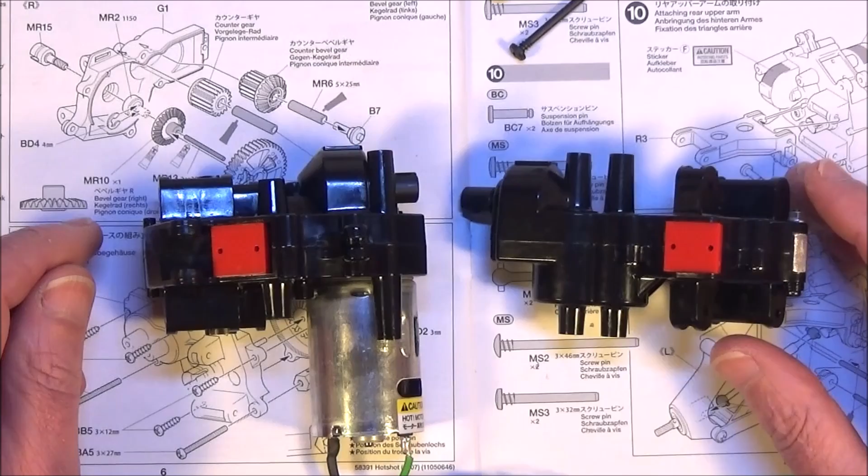In part 1 we got to step 8 and we ended up completing the rear gearbox and the front gearbox, as you can see, ready to go.

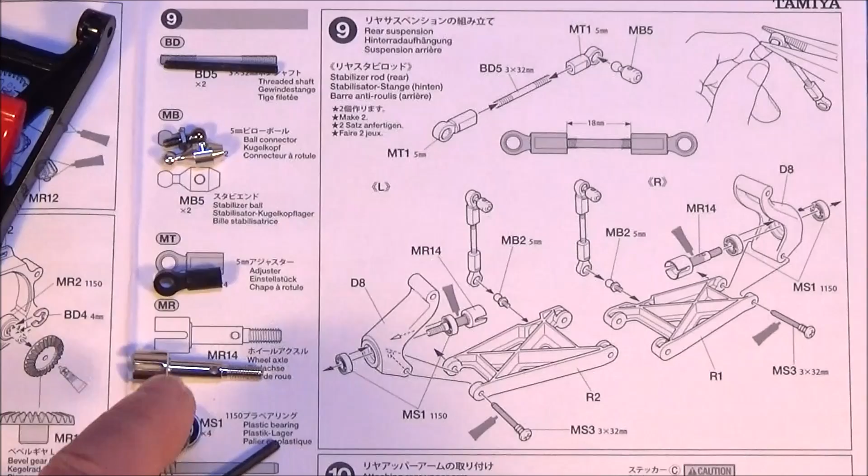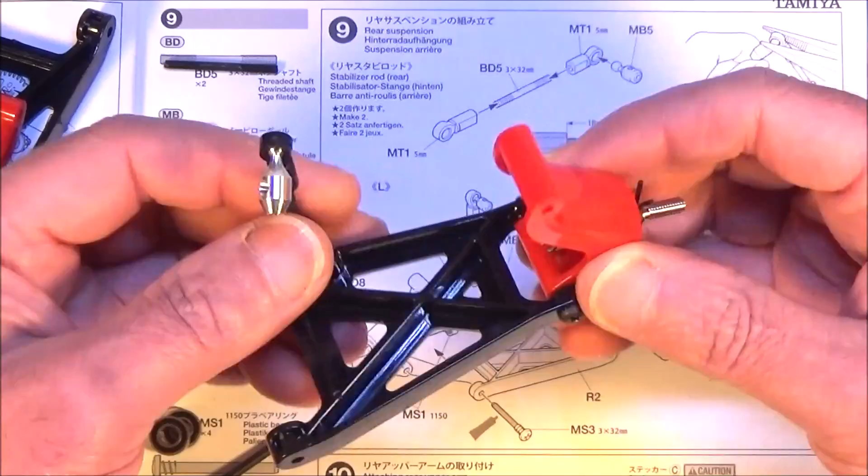So let's jump straight into step 9, which is the rear suspension. As usual, before we start building, best to get all the parts laid out and check them off against the diagram there on the left. As you can see, I've already made up one side of the suspension because both sides are basically the same. So it should end up looking something like this, and we'll see how we got there.

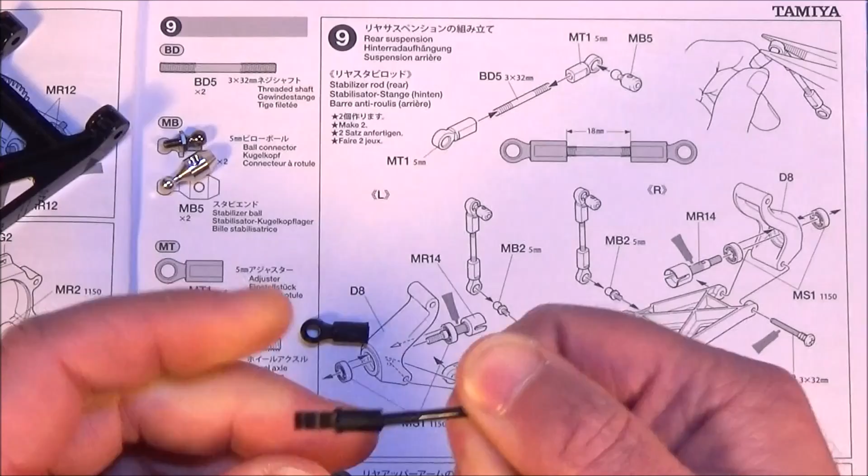First of all, get your black threaded shaft, 32mm long, and 2 of the black ball ends, which are MT ones, and basically just screw one on each end. Once you've got them started, just screw it up against each other.

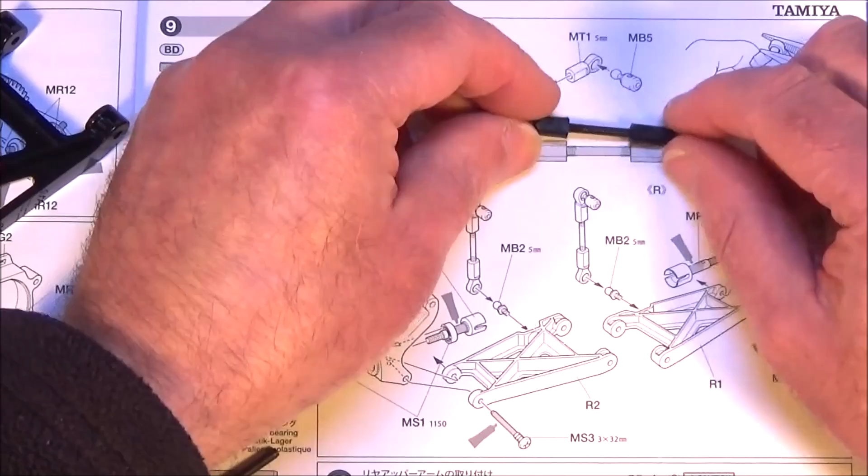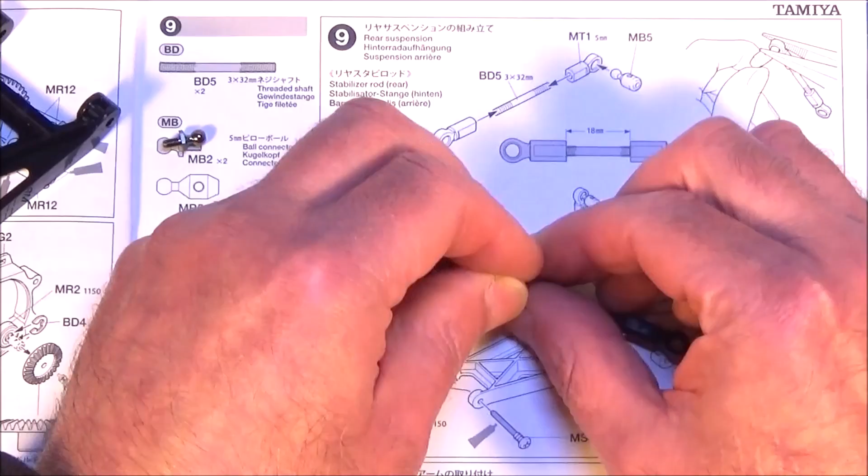You can use the diagram here, it's to scale, just to make sure you've got it the right length. Then we've got to pop in this ball joint, which is MB5, and I think the easiest way to do this is just to use a socket or something like this. Just put it over the top and press down, and that's connected.

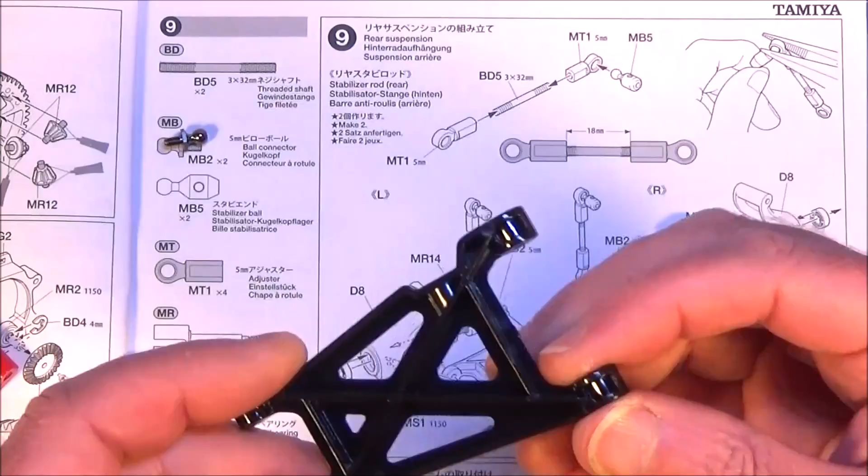I'm making up the left side of the suspension now, so you need this part R2. Copy the alignment of the diagram. Put your small ball joint into this hole. These are very hard plastic, so make sure you don't over tighten this ball connector, just a nip up will do.

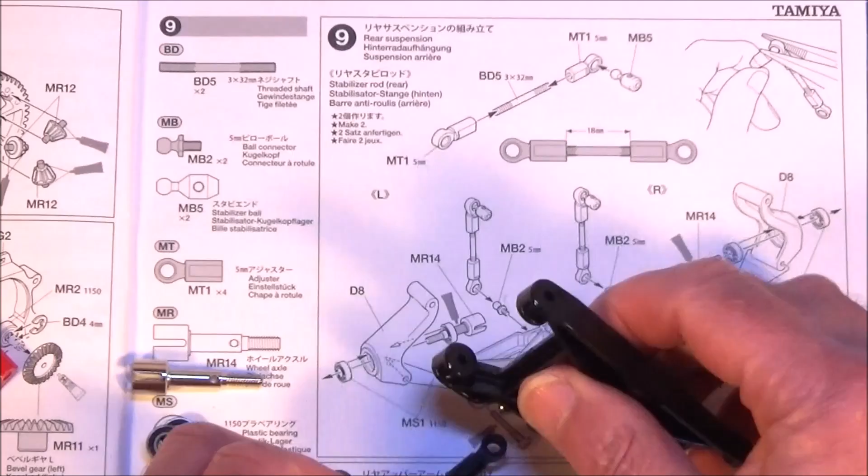In this alignment, just pop on that bottom ball joint. Again, I'm just going to press down on the table. There we go. Then you want part D8, just press in your bearings or bushings, one in each side.

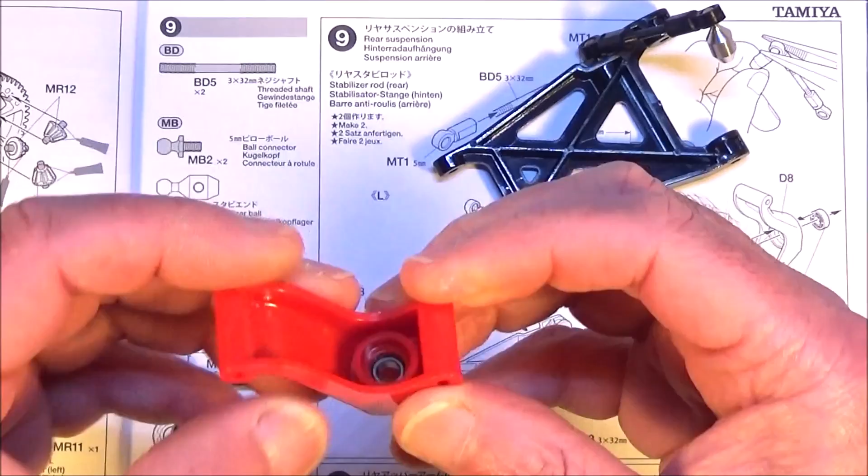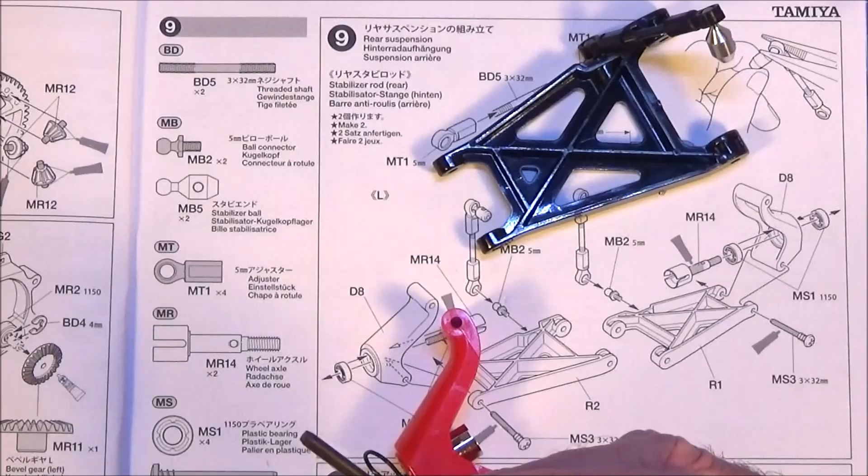Pop in your wheel axle, which is MR14. I do recommend popping in an R-clip just to hold that in place so it doesn't fall out. And your 32mm screw pin, put a bit of grease on that. I do advise putting grease on these because they will rust really easily, just a very thin coating will do.

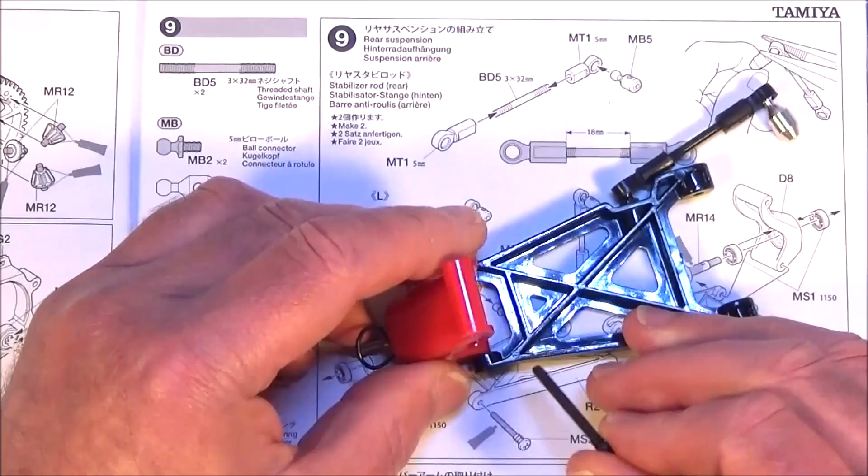Pop that into the arm, push the pin through as far as it will go, and then just nip that up. And there you go, that's step 9.

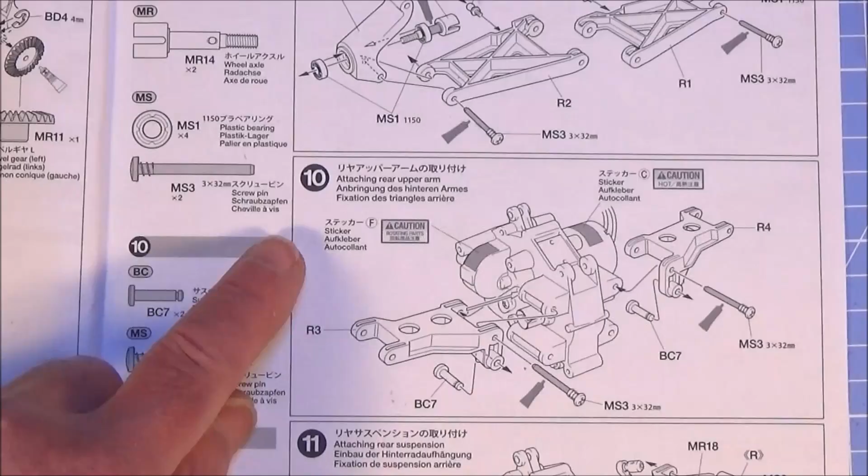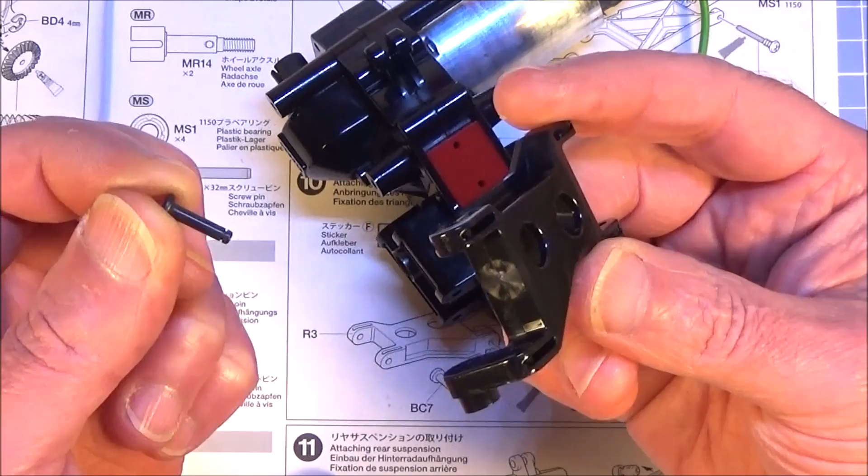In step 10 we're going to attach the upper arms, so for that you need the gearbox assembly you've done earlier, and just copy the alignment of the diagram so you've got it in this position. Then you want part R4, and this pin, which is BC7, that goes through that hole there like that, and it's a very tight fit.

Again, 32mm screw pin goes in the top here, and give that screw pin a nip up. Then exactly the same for this side, this time with part R3. Pop that pin through, and then the screw pin exactly the same as before.

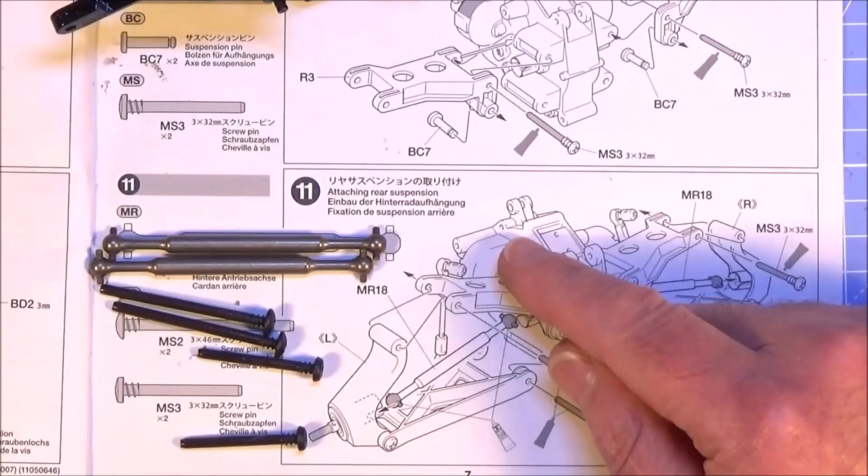In step 11 we're going to attach the rear suspension, the lower arms we did earlier, so I'm just going to do the left side. Get the bottom lined up and pop in MS2 screw pin, which is the long 46mm pin. Get that done up. Obviously put a bit of grease on those pins.

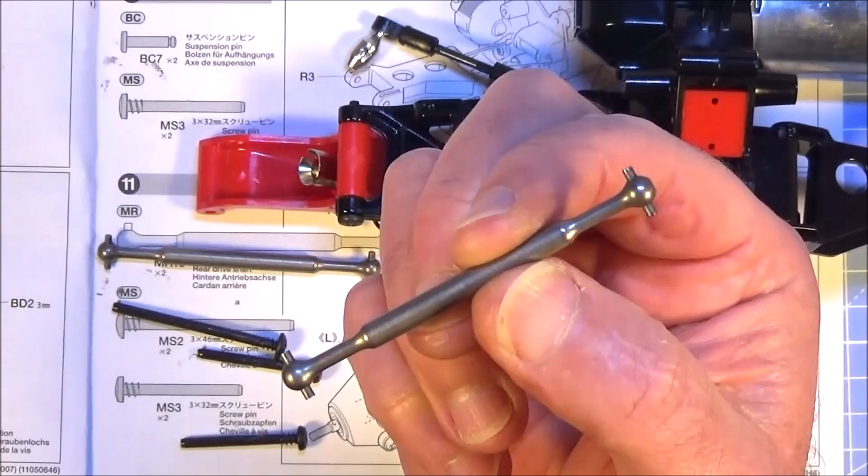Then you want your rear drive shaft, which is the lighter of the 2 drive shafts. You can see this is the front one, I think, with the ridge in it, and it's black, so this one, don't get them mixed up.

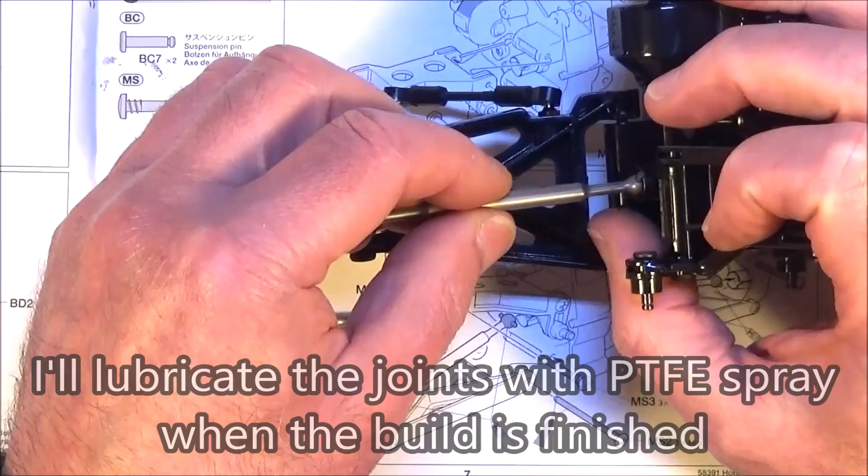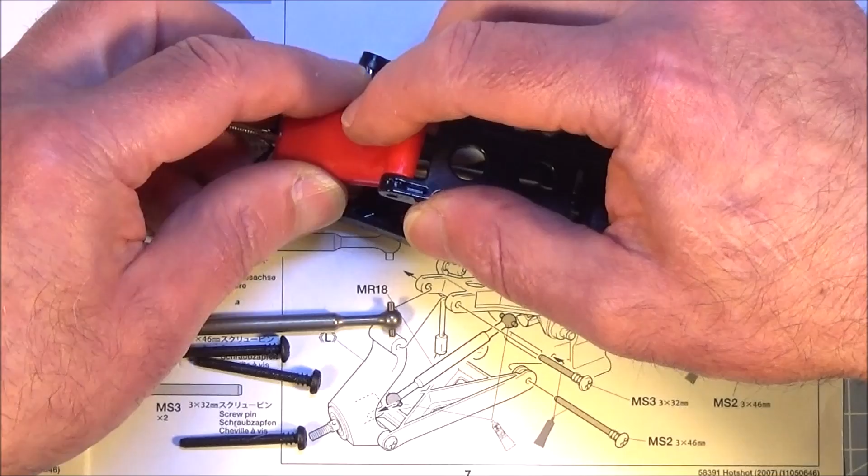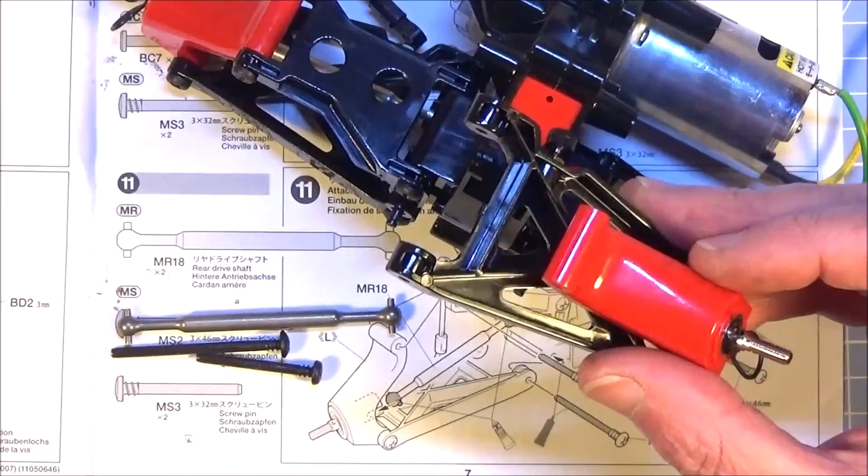Pop that in the output drive cup and pop the other end in the wheel shaft. Then we can align the top holes and pop in the shorter 32mm screw pin. Repeat for the other side. At the end of step 11 it should look something like this.

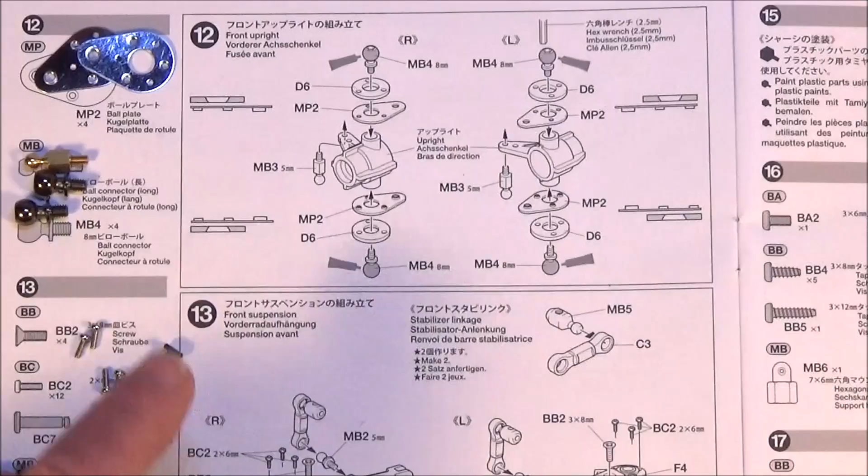Now steps 12 and 13 are all about putting the front suspension and steering components together, and I've already done the right hand side, which is this one here and down here, and you'll end up with something looking like this.

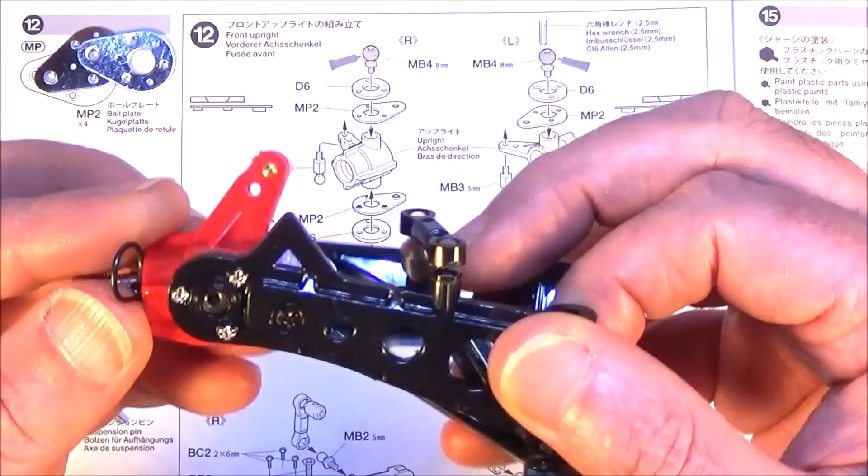So we'll just go through putting the left hand side together. It's exactly the same but opposite. So the first thing we need to do is get the upright.

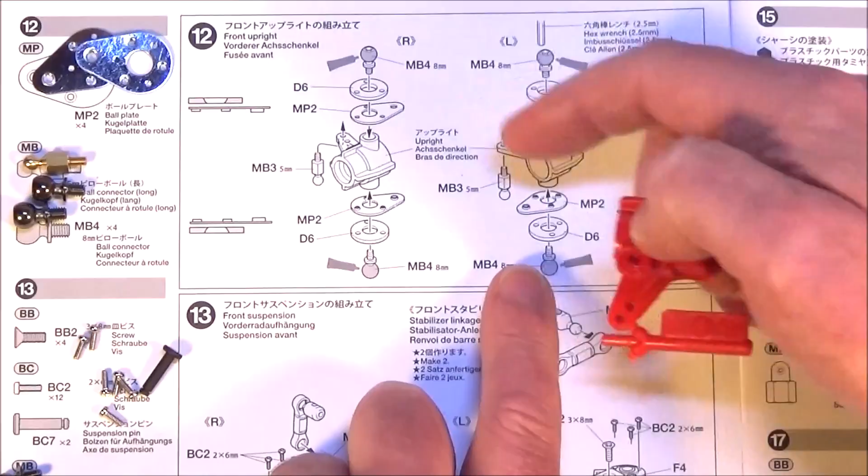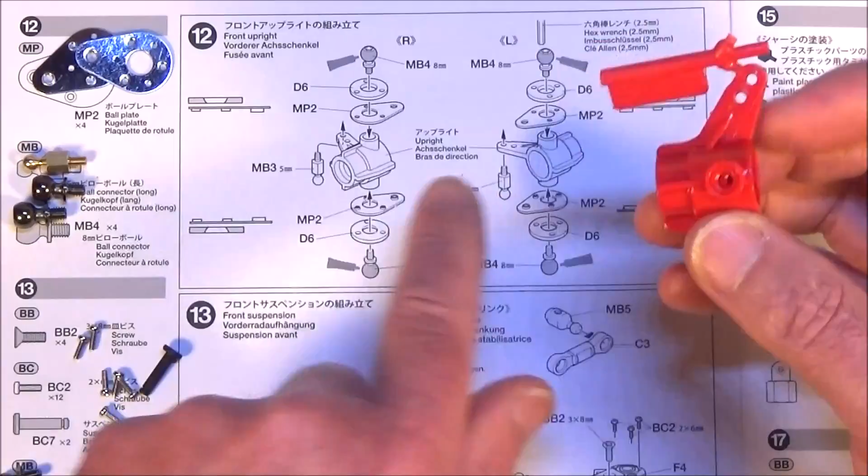Step 12 is doing the front upright, which is this thing. Now make sure you don't use the one that's on the parts tree. This came on a separate tiny little sprue there, and the left and right sides are exactly the same, you just reverse them. So the first thing we want to do is make sure we get this in the same orientation as the part in the diagram, which is like that.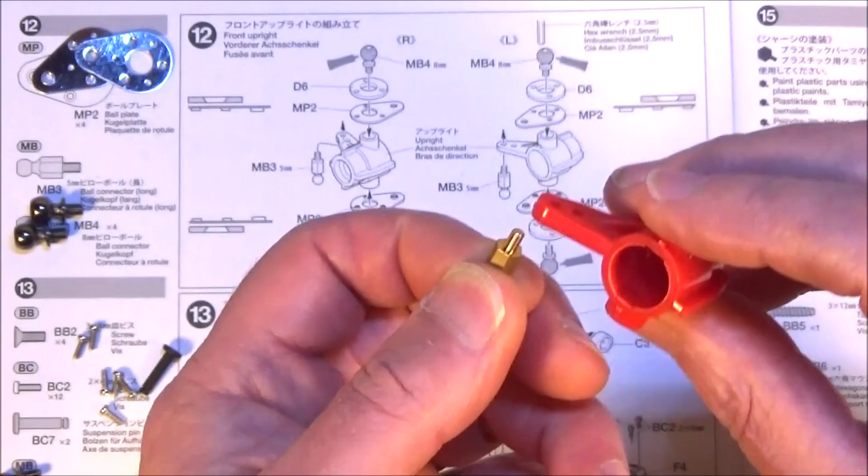So the first thing we'll do is get part MB3, which is the 5mm long ball connector, and that's going to go underneath into the outside of the two holes.

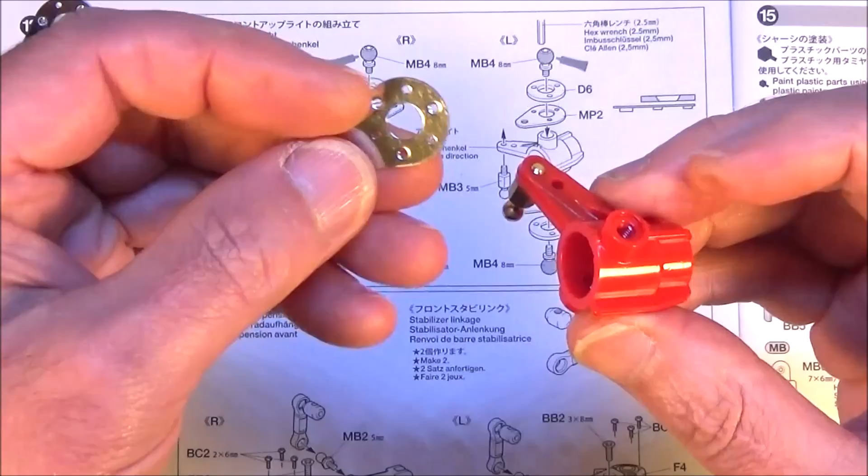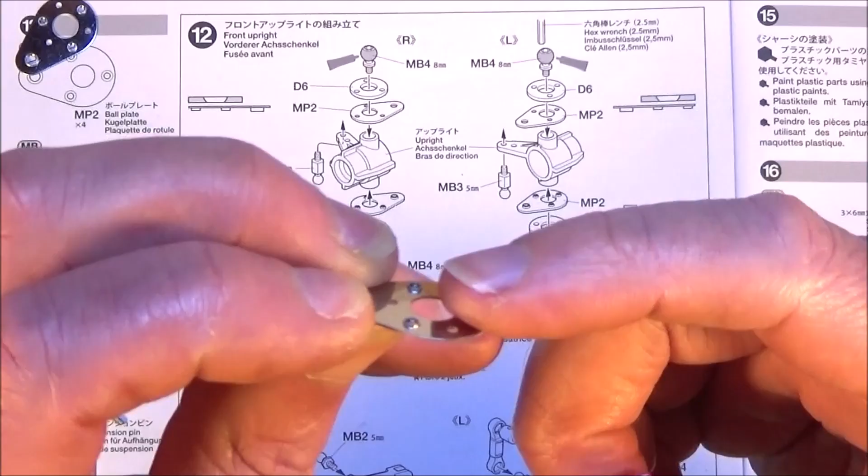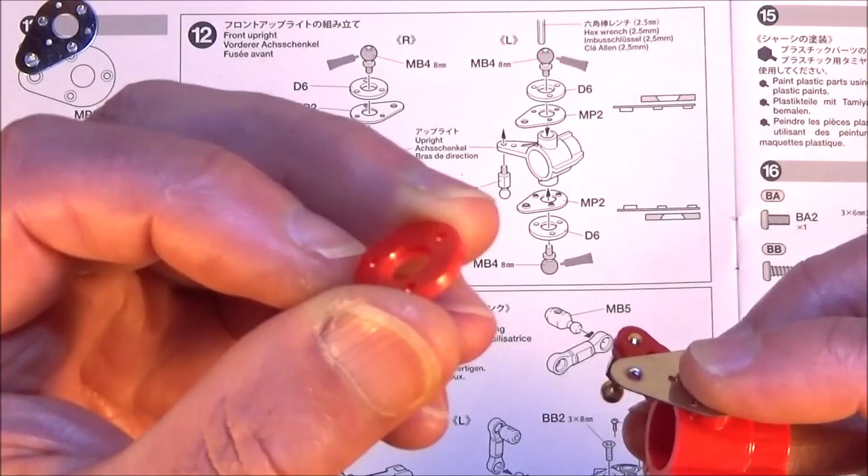Now we need to get the metal plate, which is MP2, and you've got to make sure you get this the right way up. There's raised parts where the holes have been punched out - those need to point downwards on top. Then plastic part D6 has a chamfered or beveled edge, and that bevel needs to point to the open side on top, as you can see in the diagram.

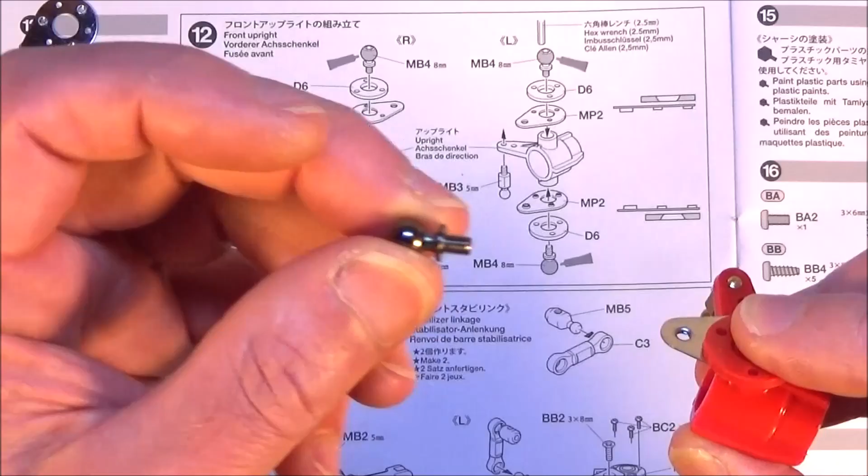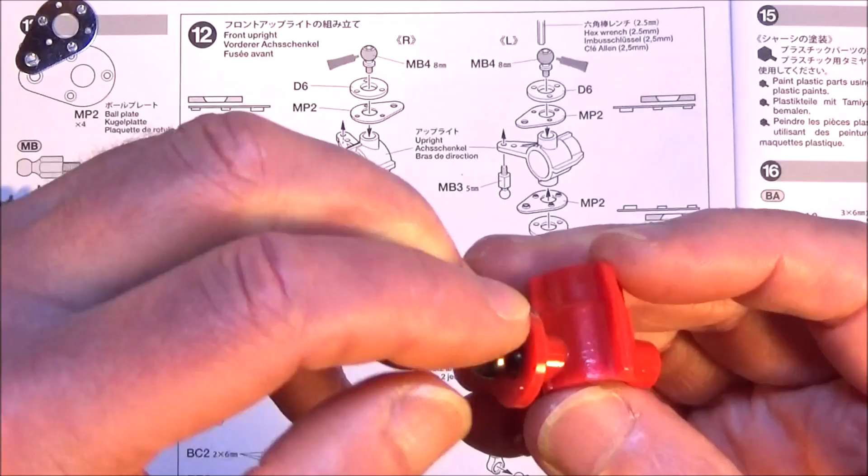Then you want your large ball connector, which is MB4, and we just screw that into the top here. Note that the threads are formed into these holes on the top and bottom, so make sure you don't get it cross-threaded.

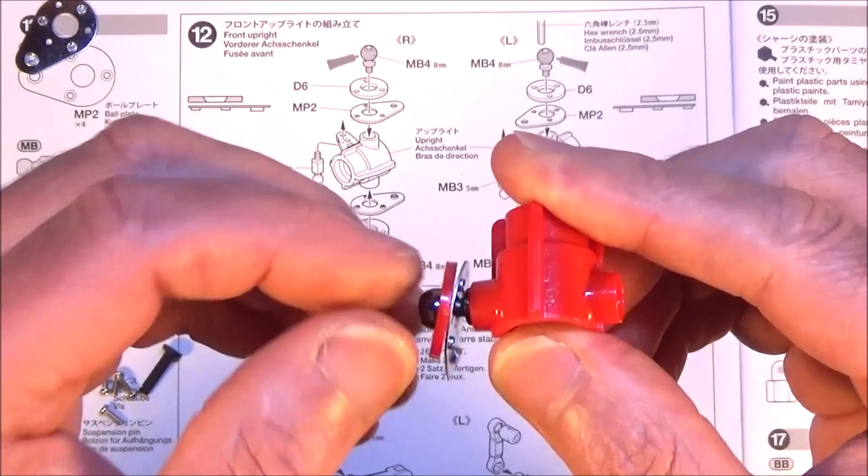Just want to make sure that's away from the actual upright itself, and we'll get that tightened up. As you can see, the instructions show putting grease on these, but I'm going to put some dry lubricant on these when it's finished.

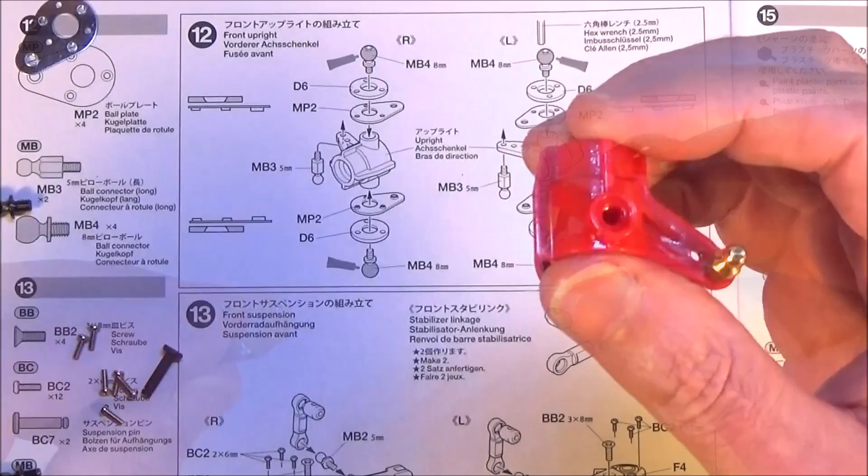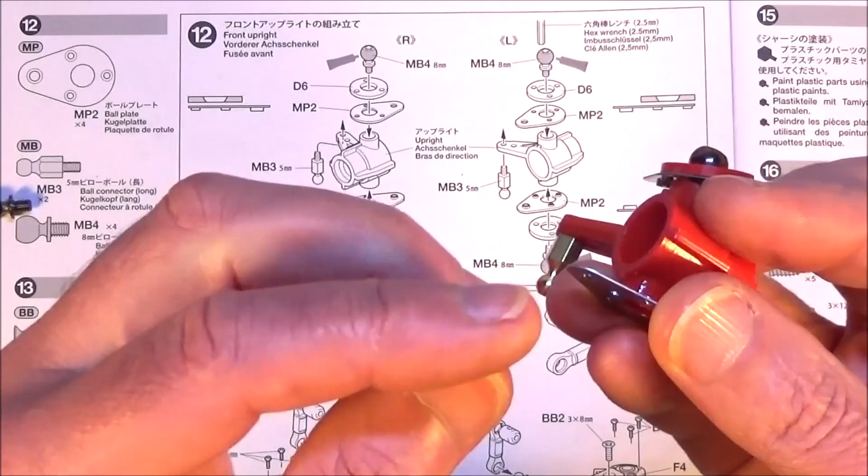Same again for the bottom, but this time the raised parts on the plate point upwards. The open end of that chamfer on the plastic part points down, and again just get that large ball screwed into the bottom. And that's the end of step 12.

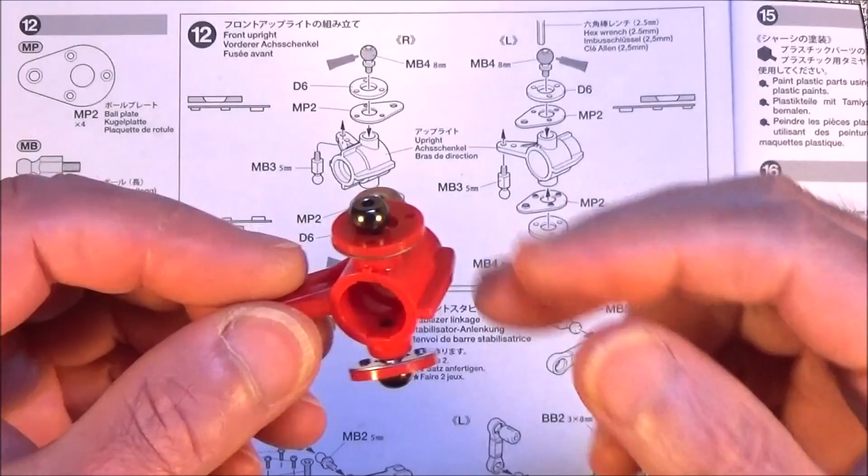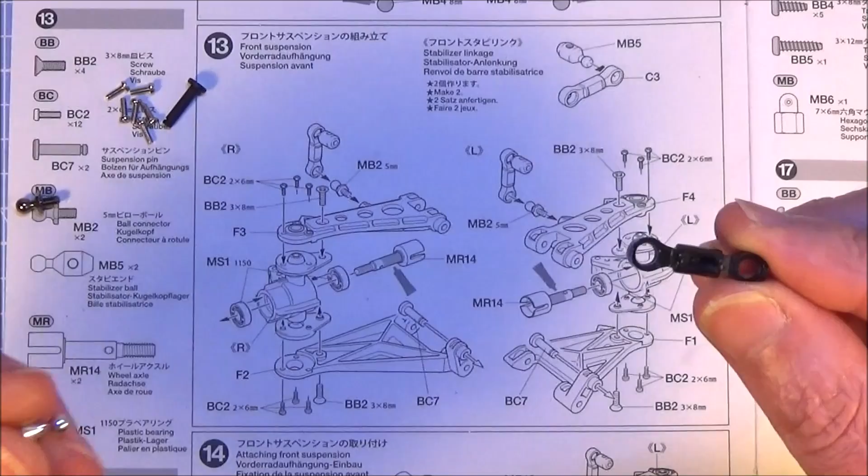As I said, for step 13 I've already done the right hand side, so we're going to complete the left hand side. Get plastic part C3, and then the MB5 stabiliser ball, and we need to pop that into one end - I'm going to use my socket for this.

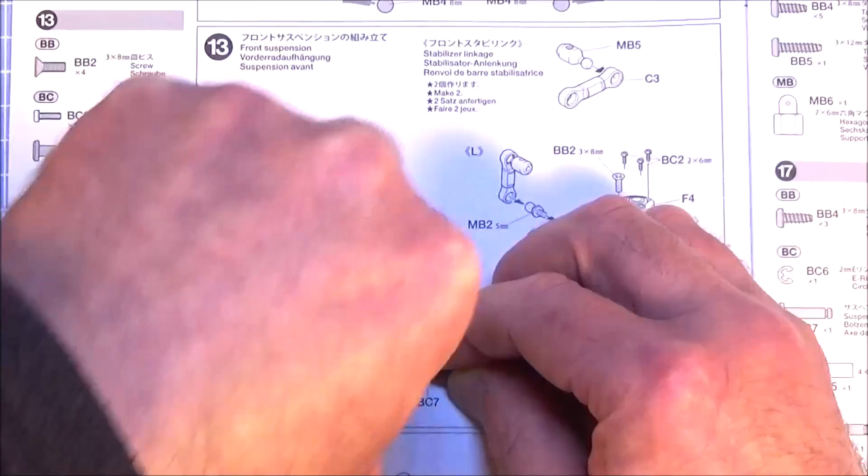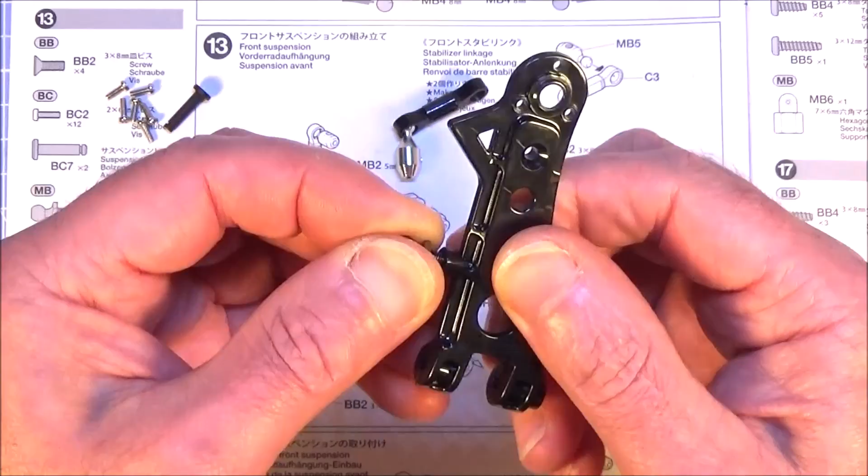Then we want the top arm, which is F4, and then MB2, the 5mm ball connector, and that's going to go in that hole there. Then get your part C3 that we just did, and we need to pop that on like so.

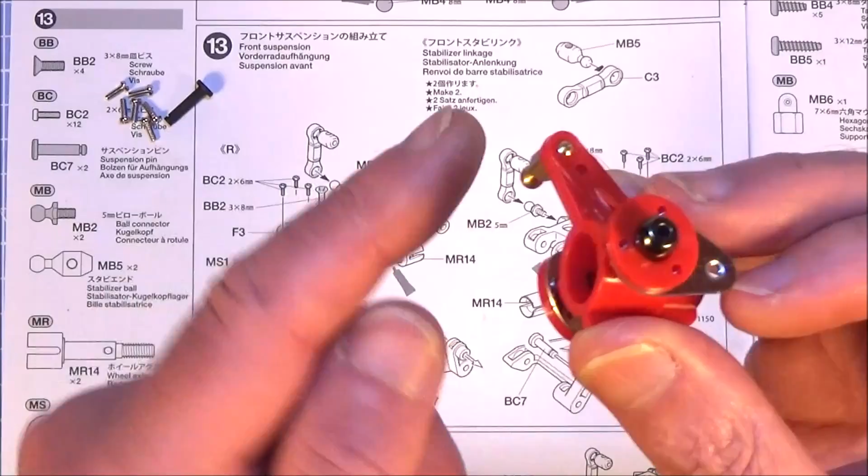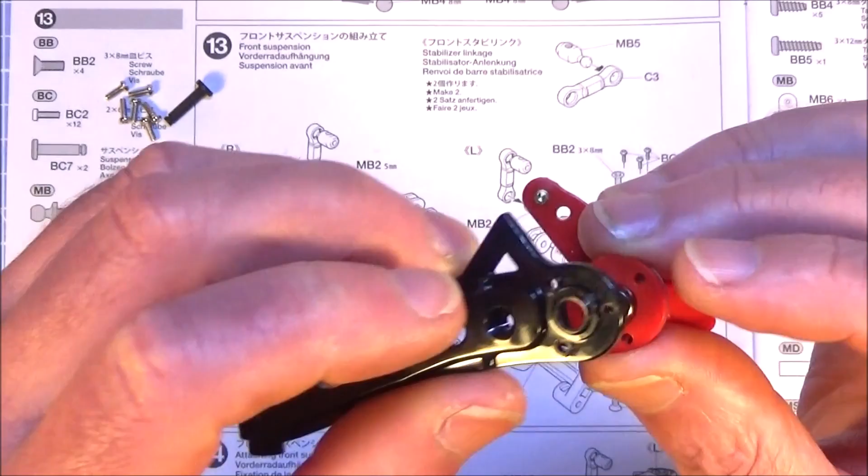Okay, so now the fun begins. We get the upright, make sure the ball is pointing downwards and backwards. We need to get this lined up so that hole in the metal plate lines up with this hole in the top arm. Then the 3x8mm countersunk screw can be put into that countersunk hole, and hopefully we can hold this all in place with that screw.

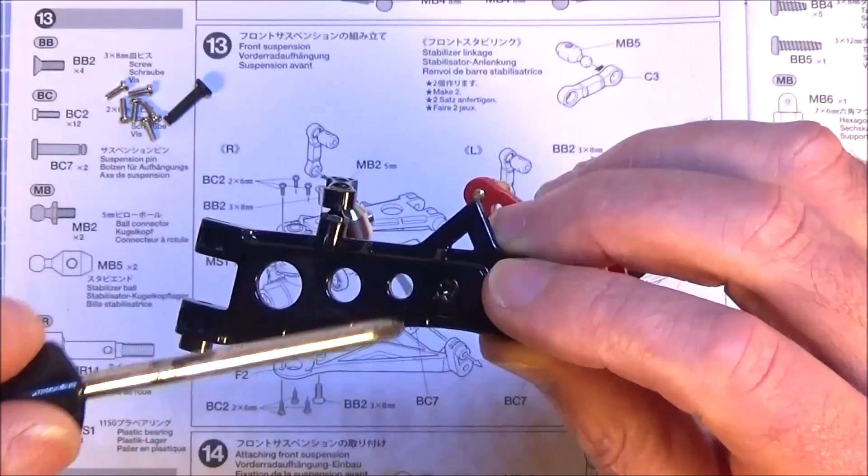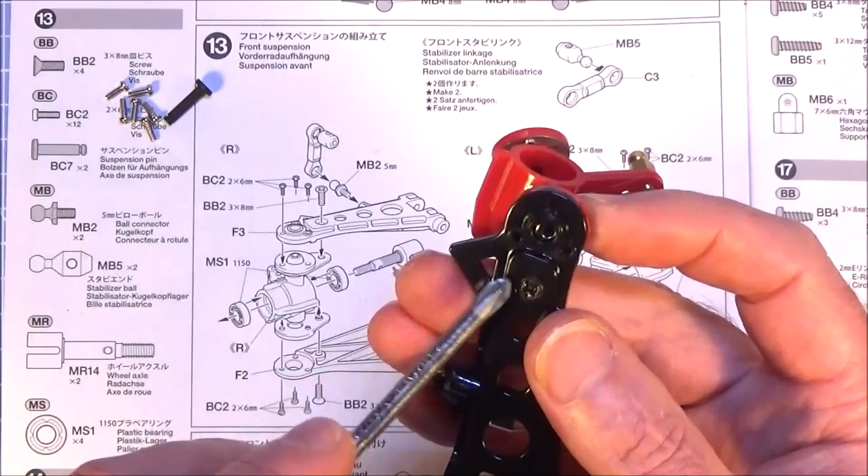Now I recommend you don't do this up tightly. What we need to do is get all these screws in before we finally nip them up at the end, because now you've got to rotate that red part so the three holes line up.

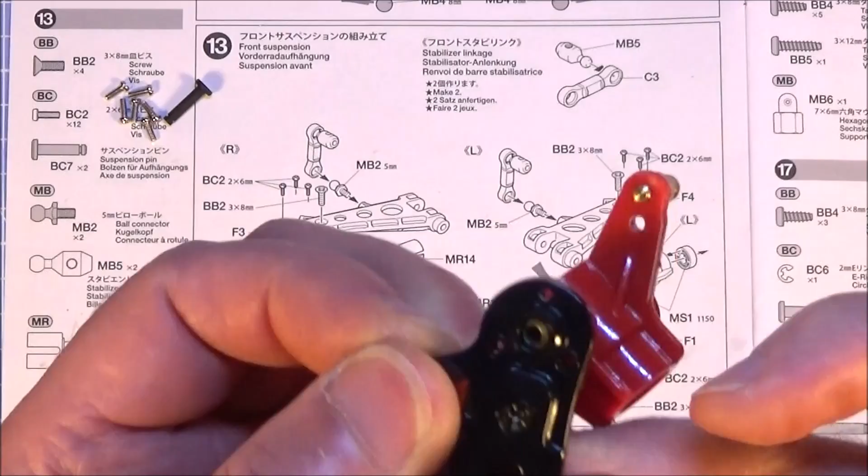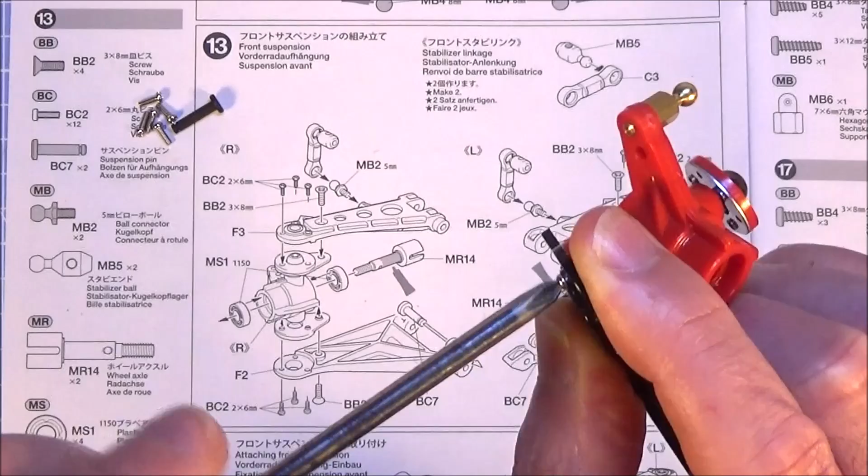You need to do that so you can get your small 2x6 screw to go through the two plastic parts and into the metal plate at the bottom. So that's one, there's the second one, and the third.

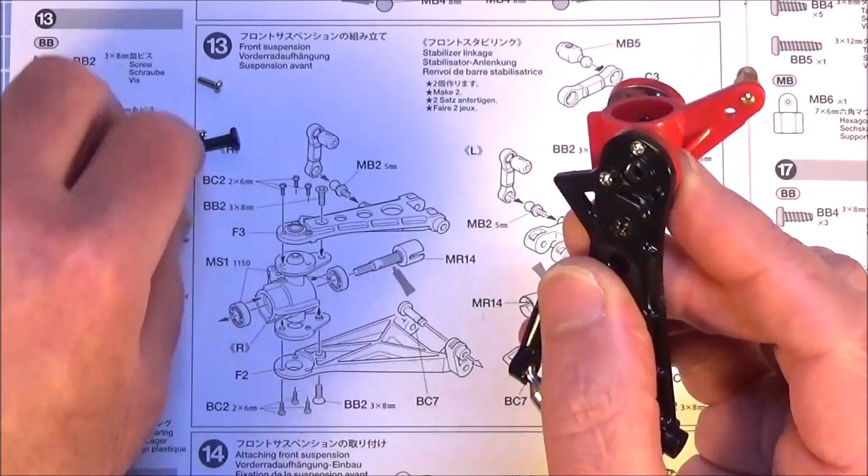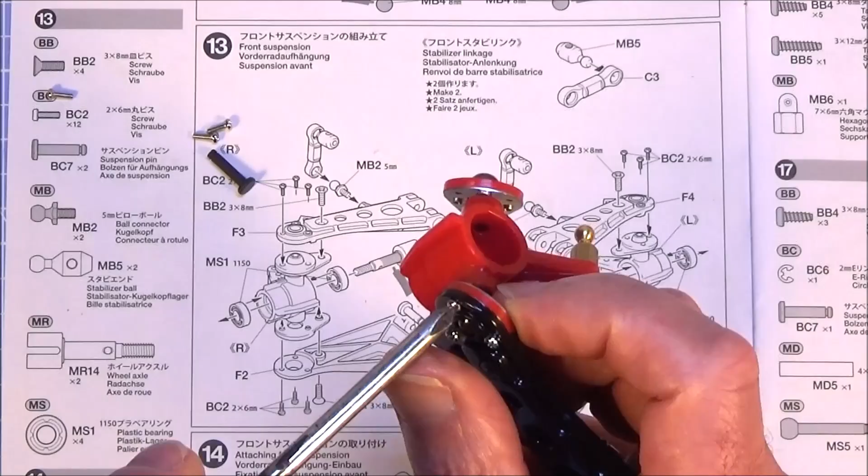And once they're all in and it's all lined up, we can give them a final nip up. Okay, so that's the top bit done - should be moving quite nice and freely like this.

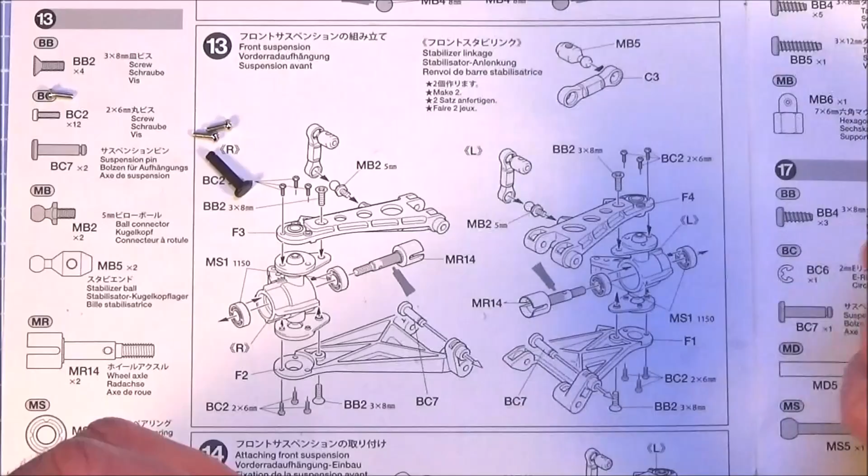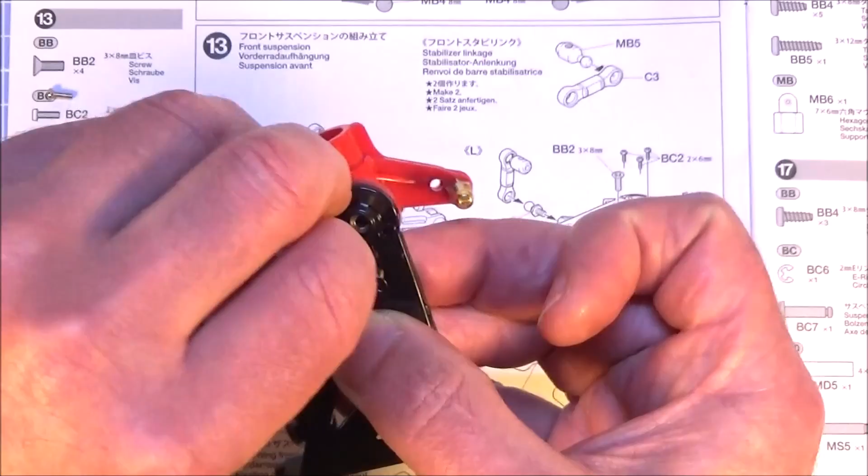It's simply a case of getting the bottom arm, which is F1 for the left hand side, and we need to do the same thing again - get these lined up and pop that BB2 countersunk screw in again. That will hold it all together, and put in the 3 screws as we did earlier, like so.

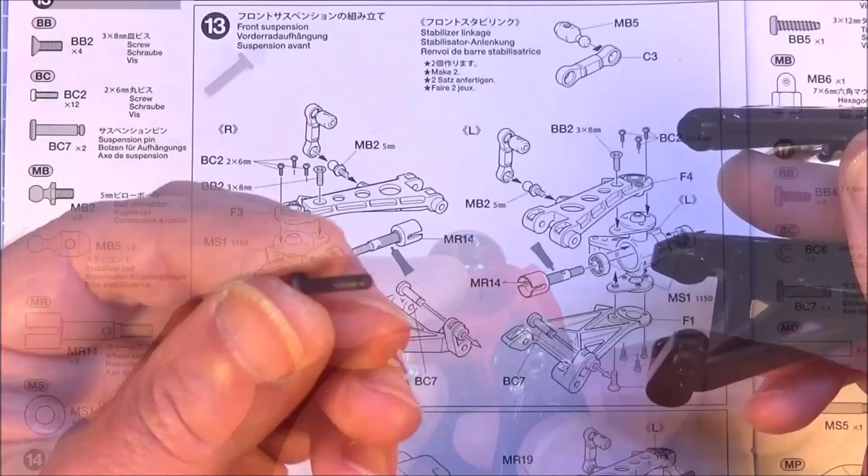Just need to get the pin BC7, pop that through this hole like that. Then your bushing or bearing, one in each side of the upright. They are a very tight fit, I've got to say.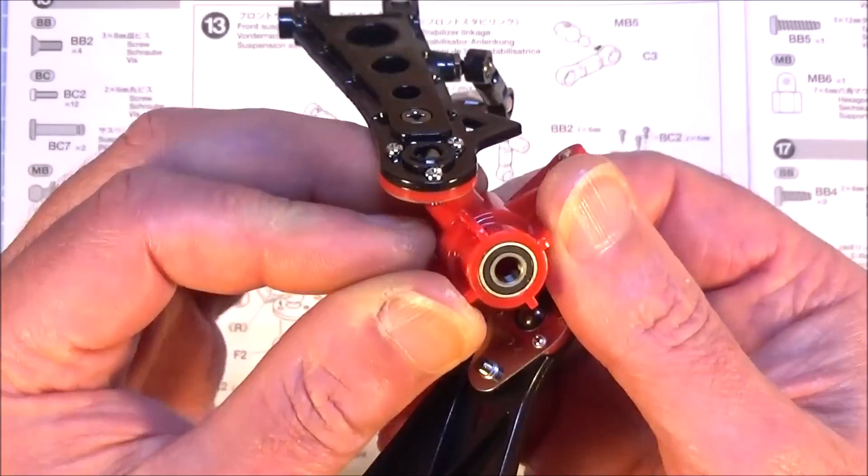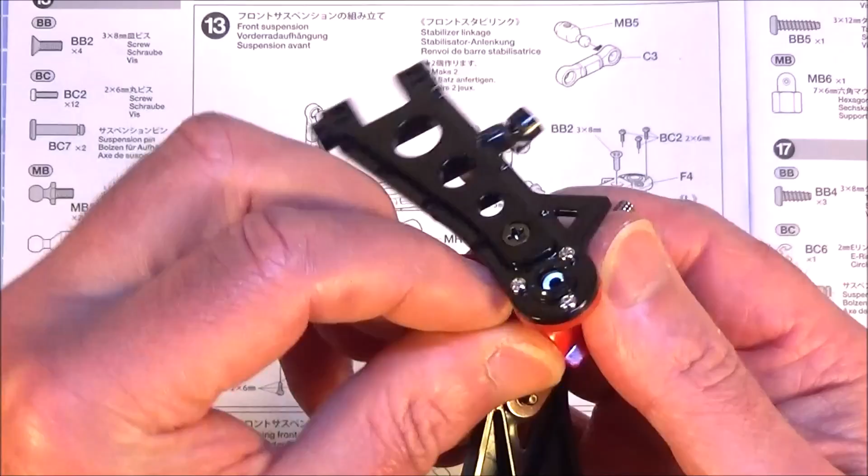Your wheel axle - I prefer to put the bearing on and then push it in, making sure it's seated right into the upright. Might help to give that a push with a screwdriver, make sure it's all the way. I'll just secure that with an R-clip.

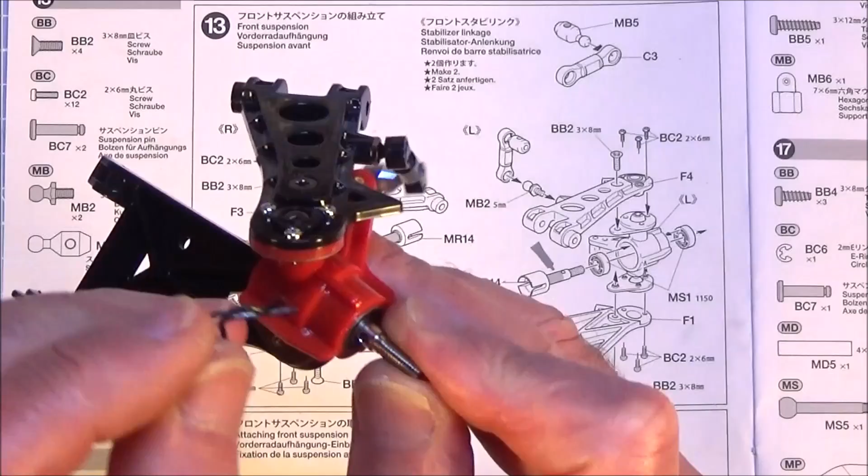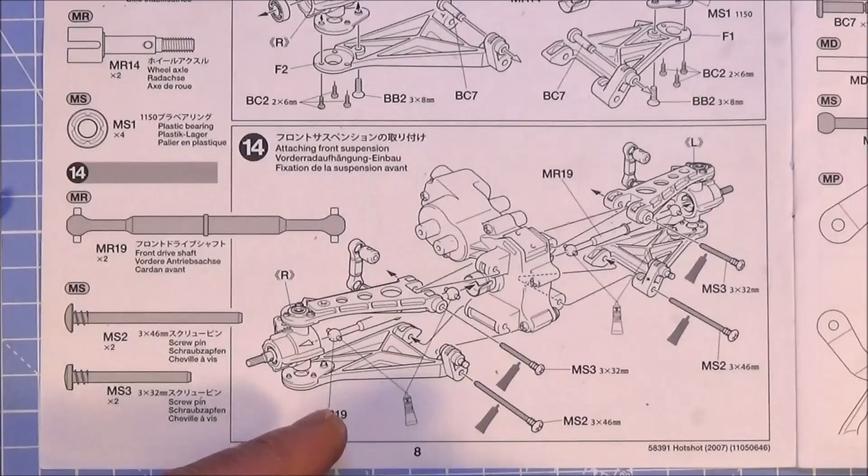And with both sides done, that is the end of step 13. On step 14, we're going to attach those uprights we've just made, or the suspension components, onto the front gearbox. So copying the orientation of the diagram, get the right hand side, that goes on there.

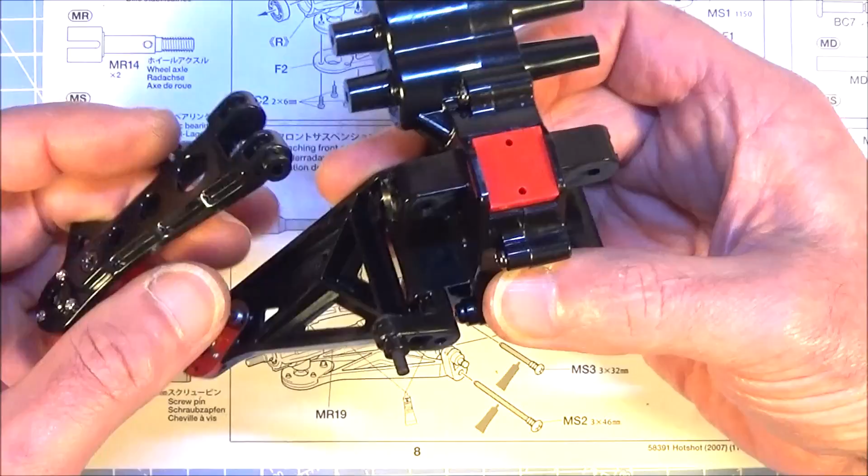The 46mm screw pin, the longest that we got in the kit. And just get that lined up, making sure this is in the right position so it stops up against that lug on the gearbox casing, like so.

Get your front drive shafts, which are the black ones, and pop that into the output cup and into the wheel shaft - this is when you need 3 hands. You need to get that top arm now located onto the mount on the gearbox there, and try not to lose your drive shaft at the same time. And then it's your 32mm screw pin that just holds that in.

It should look like this when you're done, and just do exactly the same for the other side. So there you go, there's the front suspension assembly all done. We matched that up, we've got the rear assembly finished as well.